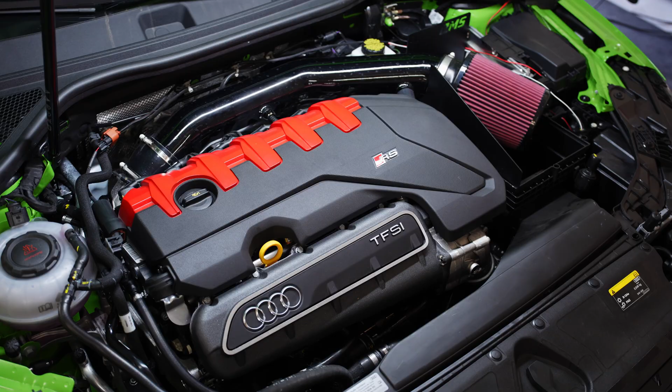Today we've got my 2024 Audi RS3 in the back of the warehouse right now. Pime's getting it all set up for our dyno today.

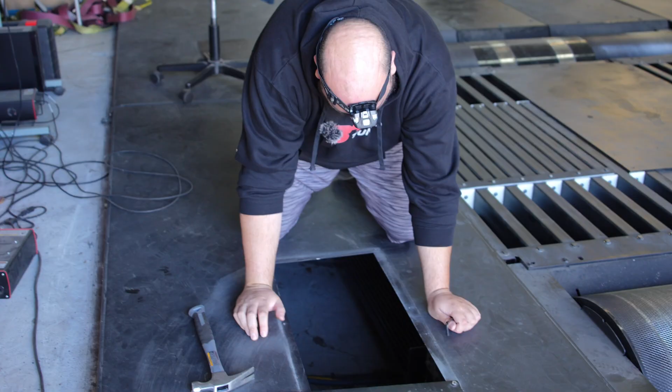Good morning guys, we're about to get the RS3 on the dyno. Right now it was set for rear wheel drive from the last car that we dynoed. We never showed you guys how to actually link the Dynojet and show you guys how it captures and gets into the all-wheel drive setting. And we will hammer the shaft in. What did he say? To link and lock the belt from front to rear.

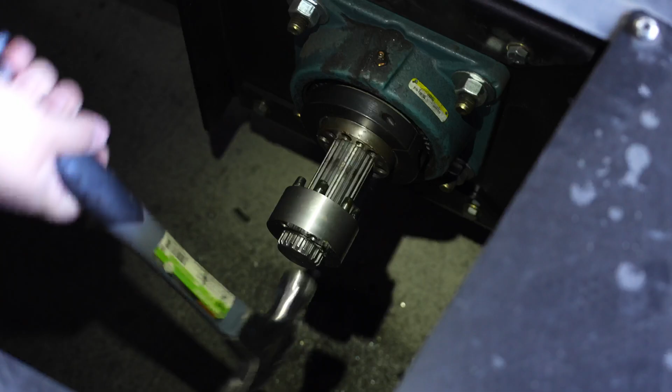Helps to make sure it's in first. Once you get close, you want to line up the dowels to the holes. As you can see, when I spin the drum, it's spinning the shaft. And then with these two bolts, it will lock up.

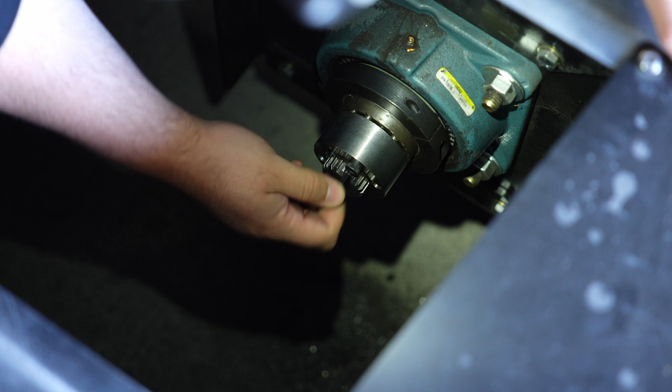So this is what keeps breaking all the time that we have to fix. This locking mechanism keeps shearing off and breaking all the dowels. Eventually I just got a whole new spline as well, since it's interchangeable with C-clips that lock in. We changed this a couple times already, and we even broke the inner piece on the front shaft. So hopefully this is the last revision. We had to custom make some billet parts on the front shaft. We might have to do it as well for the rear to make sure this doesn't come apart again.

Check out the newest addition to this car. Went out and got some new Speed wheels on it. These things look sweet. Pime has got the car all strapped down, ready to go. We're gonna go ahead and run JB4 Map 0, see what it makes with stock power, 91 octane in the tank.

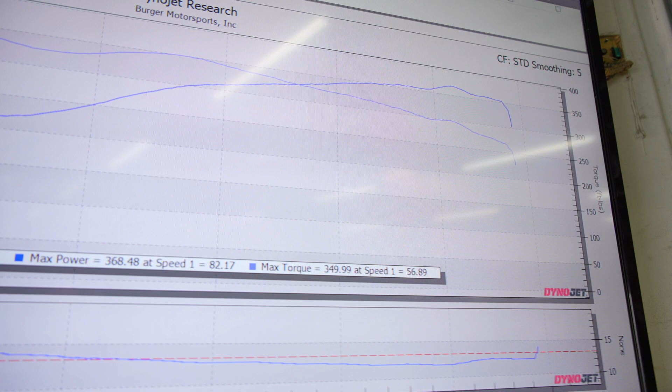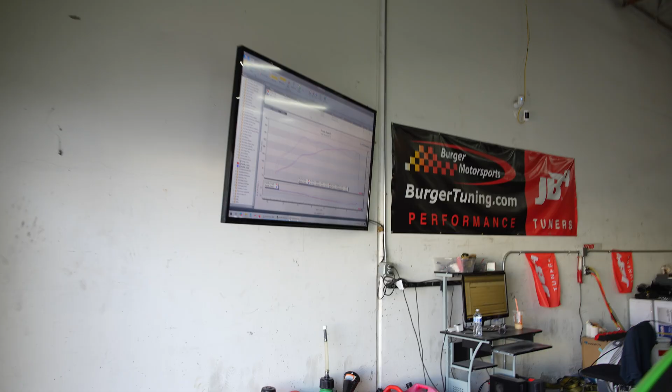What she does on Map 0. 368 wheel horsepower and 350 wheel torque. We'll probably run it again. Here goes Map 0 again. What did she do? 368 wheel horsepower and 351. All right, that is the stock power on this RS3.

368 wheel horsepower. It surprisingly feels a lot quicker than 368 wheel horsepower. These RS3s honestly feel like they have 100 more wheel horsepower than they actually do. Now that we have our stock numbers, time to turn it up to JB4 Map 1 on 91 octane, see what she does.

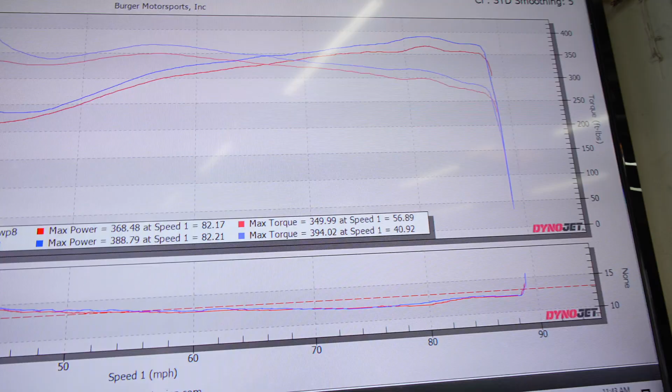JB4 on Map 1 went 388 wheel horsepower and 394 wheel torque. Nearly 50 wheel torque gains right off the rip. So we're running into quite a bit of timing pull on Map 1 with our 91 octane in it. And before we want to move to E85 or anything like that, we want to make sure that we can get our timing looking good.

We're going to implement IAT spoofing onto the car and take it up to 150 degrees to try and lower our target timing within the stock flash. With this being done, timing will look really smooth, the car will run good, just that lower timing on 91 octane. With this change being made, now time to take the car over to Map 2. Let's see what she makes.

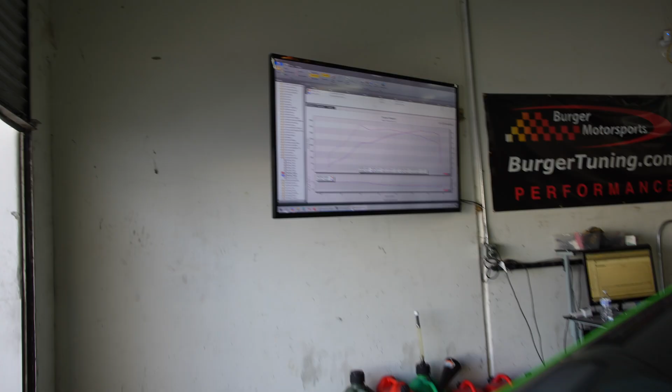Let's see what she did. Map 2 went 398 wheel horsepower and 401 wheel torque. It appears that Map 2 is going to be our stopping point for 91 octane.

That being said, it is time to install our Fuel It Flex Fuel kit, get it thrown on there so we can see our exact ethanol percentage in our tank when we fill up with the E85. You get a true perfect mix. In my hand right here is the Fuel It Flex Fuel kit for our 8Y RS3.

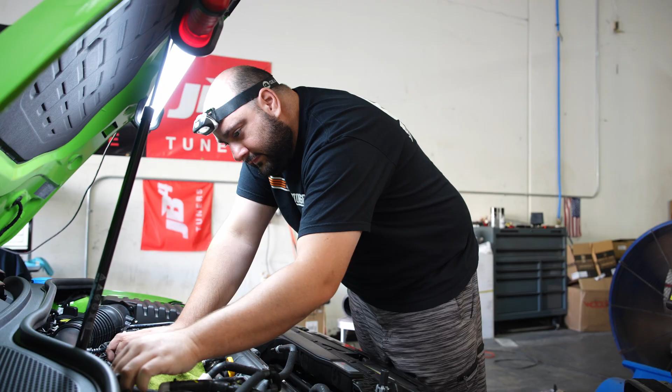I've just installed our Fuel It Flex Fuel kit onto the car now. We've got to head over to the JB4 app and then set the bit option. We're enabling pin 1 on the E85 firmware to display the E85 content within the JB4 itself. Now that the Fuel It Flex Fuel kit is on the car, we've loaded up JB4 Map 3. We put some ethanol into the tank. This will be JB4 Map 3 with a 4 PSI additive.

Sounded pretty good. 417 wheel horsepower and 426 wheel torque. JB4 map 3. I didn't specify this earlier, but map 2 is 3 PSI, and then map 3 is 4 PSI. Additive, not absolute map. Adding on to what the stock target is on the factory flash. JB4 map 4, 5 PSI additive.

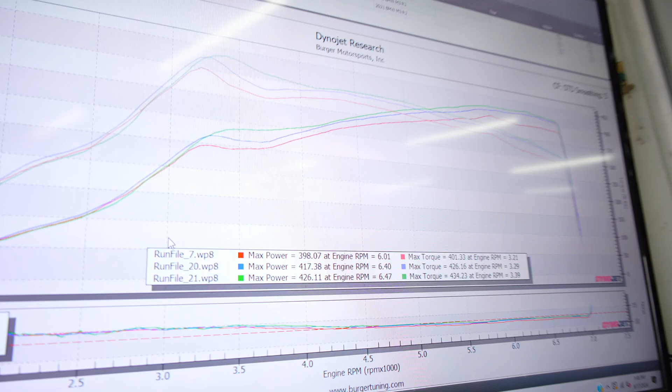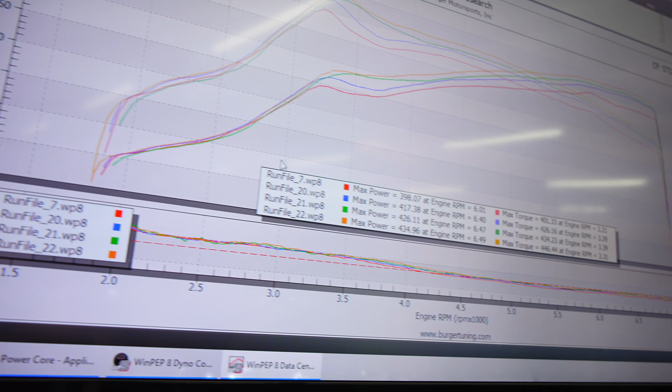426 wheel horsepower and 434 wheel torque on JB4 map 4 at 5 PSI additive. We're noticing some timing corrections on map 4, so we put in some more E85. We brought it up to E35, ran map 4 again. Let's go look at the gain. 434 wheel horsepower and 446 wheel torque on JB4 map 4.

We just switched over to map 5. It's about a 6 PSI additive. If the log looks good, the graph looks good, we'll go ahead and throw on our 3.5-inch V1 8Y intake. We got some spicy gains here, y'all. 463 wheel horsepower and 452 wheel torque. This graph looks freaking phenomenal too.

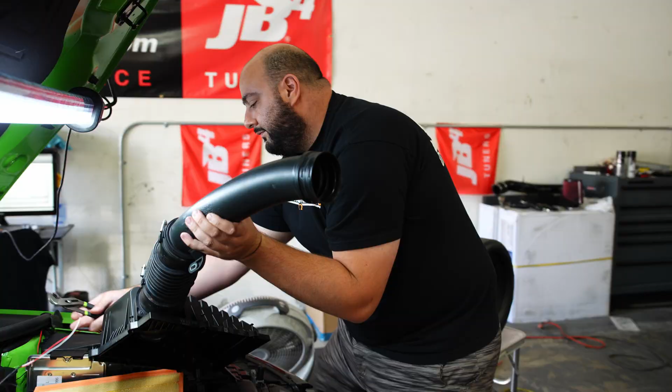Now that the intake's on, we're gonna go ahead and run map 5 yet again on our E35 mix. Honestly, with these cars, they're pretty restricted, so I bet it probably does like another 10 to 15 wheel horsepower with just our Burger Motorsports intake on it on map 5.

New wheels though, y'all. What do you think?

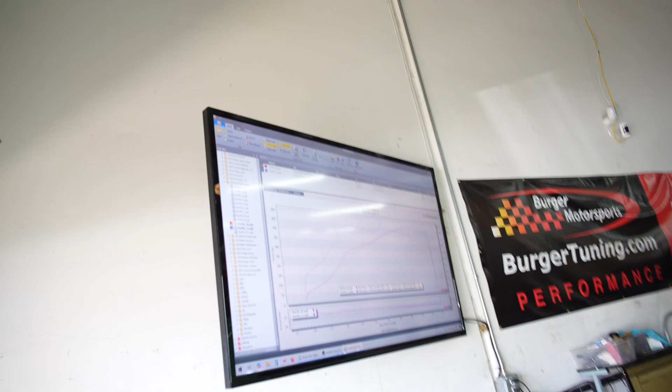Pretty much called that on the money. 478 wheel horsepower and 445 wheel torque with the Burger Motorsports 3.5-inch intake on it and JB4 map 5. How do you think of that one, Pym? Pym just made a couple more adjustments. This is going to be our last run with the car. We're hoping for 500. It's probably not likely with the stock downpipe. All right, Pym, go ahead.

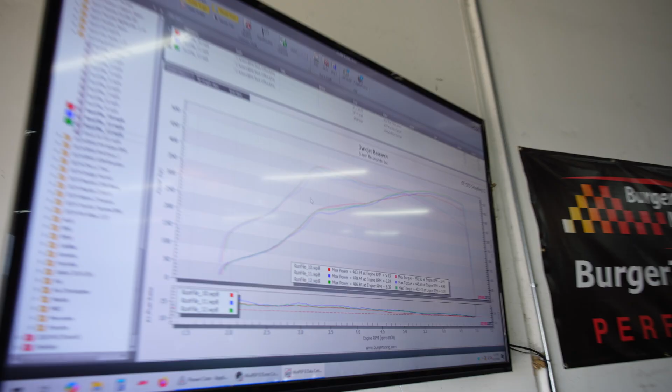486 wheel horsepower and 452 wheel torque. Well, there you have it, guys. The Audi RS3 made over 100 wheel horsepower gains today with the JB4 on it. It made the 100 wheel horsepower with no intake on it, and then once we had the intake on it, we saw gains of up to 115 wheel horsepower.